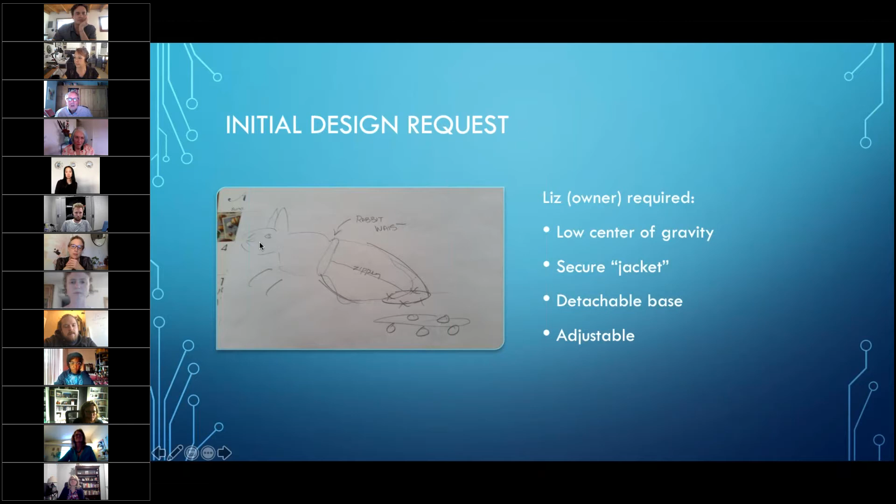Yeah, so you can see the photos again. There's Liz's sketch, her nice way to put her idea out on paper. She has no experience with 3D printing or really much as far as design or anything, but she had this idea, and it gave us a lot of direction for where we'd go next.

Yeah, and as Alec was saying, she didn't have— I mean she thought, in her head, she was picturing like a wooden circle with caster wheels on the bottom, so the rabbit could just scoot around in 360 degrees. But I don't think she knew the capabilities of a 3D printer, so we sort of upgraded her design.

But so we had to get a little creative as far as what we're going to do to make this work for a bunny.

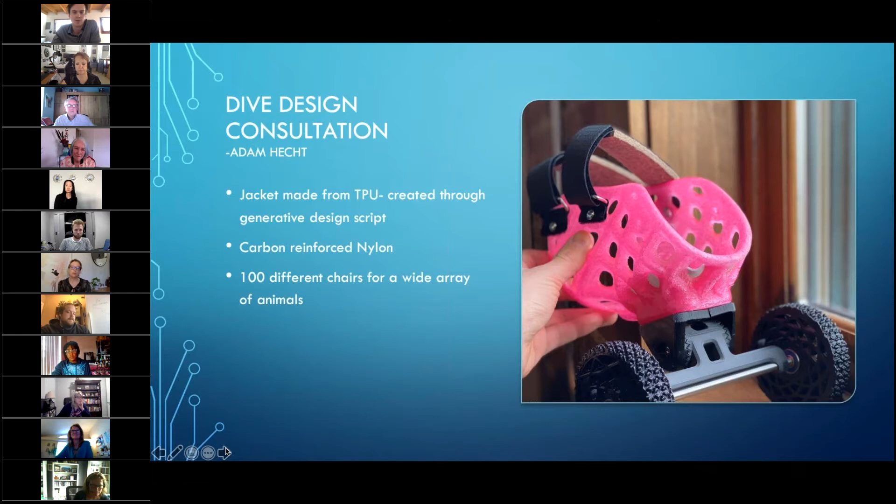On the previous slide, you noted you had used TPU and also carbon reinforced nylon. Is the pink the TPU and the rest carbon reinforced nylon? Correct. And this is the example that Dive Design did for a smaller dog, so it's a pretty different design because the front legs of a dog can still push itself around, as opposed to removing the back legs of a rabbit. It was a really cool example, and it gave us a good direction from their experience.

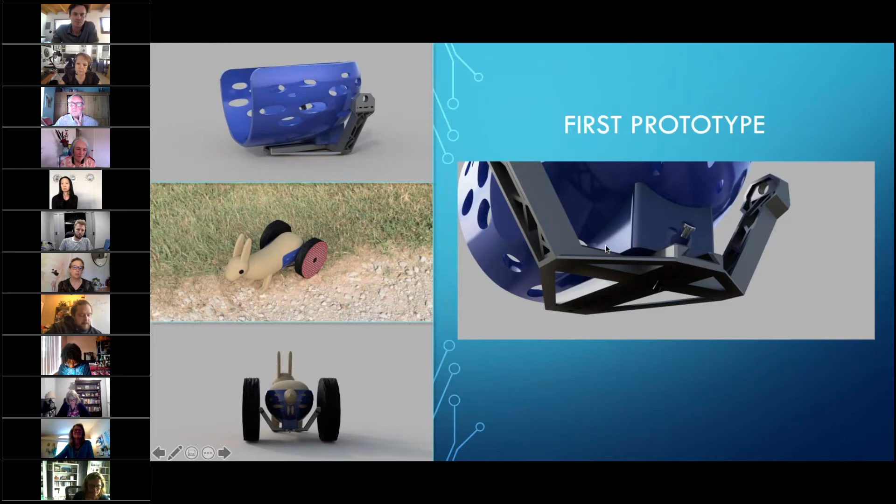So to move forward from there, Jed can talk a little bit about the wheels. TPU, if you're unfamiliar with the material, is slightly flexible - it depends on the brand how flexible, but the stuff we have is medium. So I designed a cylinder with tread, but we didn't actually model this pattern in the top picture you see inside the infill. We printed it without top or bottom layers, and in a flexible filament this lets it deform a little bit, like it acts like rubber on a tire.

This was a small test piece. The actual one is going to be bigger, maybe - I can't remember the exact size. But we're saving steps where we can.

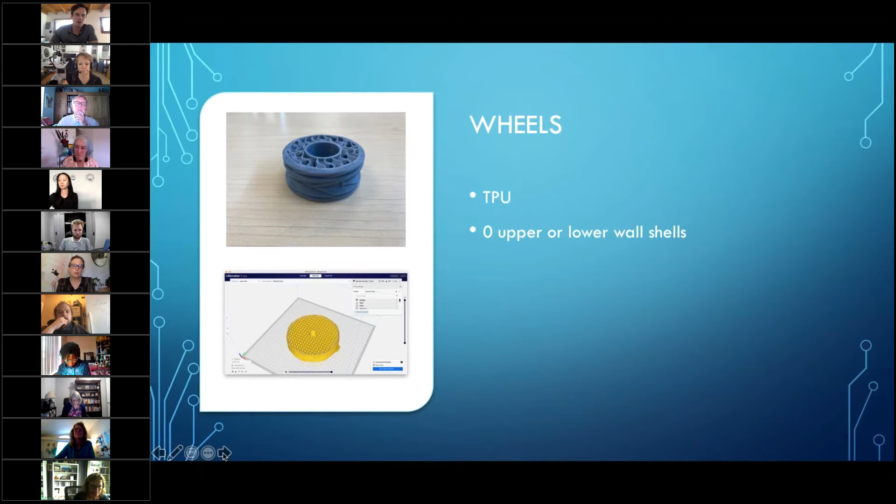I have a quick question - has the bunny figured out, does it still try to hop, or has it gotten used to the wheels? I remember Sarah's email mentioned something about it. Imagining the poor bunny on wheels - you should have put some springs in there too.

The bunny right now has one of the legs removed and it's waiting on surgery for the other. It'll be nice once it's had the surgery - it'll be a little bit lighter and able to pull this cart with its front legs. So we're trying to have as little resistance as possible, but still have the cushion of the wheels and everything.

In this picture, you can see the same idea we're using for the wheels - this gyroid infill made out of TPU, so it just squishes but then will return back to its regular shape.

We were able to get a few different components from McMaster Carr through Fusion that we can input into our design, so we know everything fits, and they were really quick to order. We couldn't use the same axle design as Adam, so we had to get these little scooter axles. But besides that, we just tried to keep it as simple as possible for Yo-Yo.

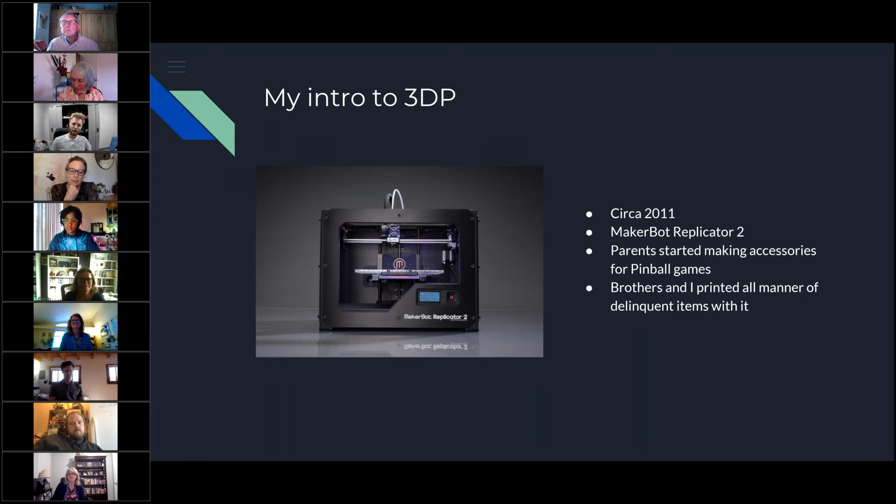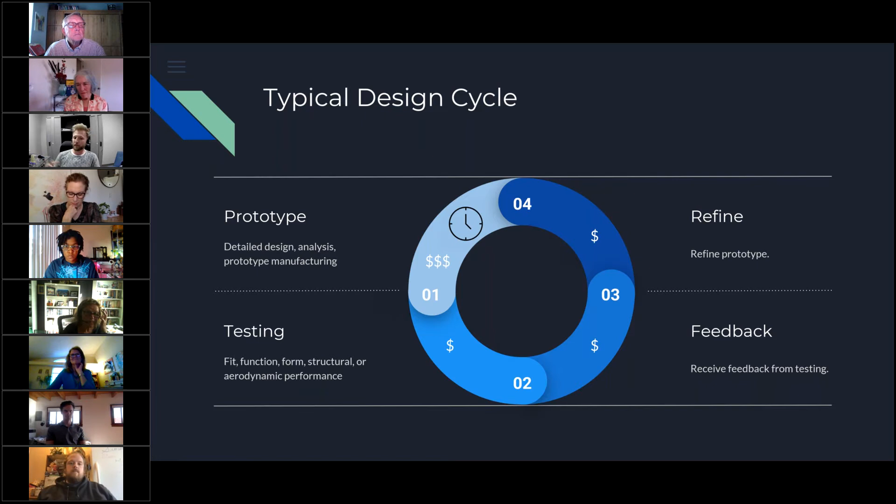I'll start with the typical design cycle for prototyping, where you do concept proofing, detailed design, testing, you get feedback from the testing, and then you refine the prototype. But typically the prototyping takes a lot of time, both lead time for manufacturing, tooling and stuff, and it's also very expensive in the traditional sense. With traditional manufacturing, you're looking at tens to hundreds of thousands of dollars, depending on what manufacturing method you're using.

So say you're making like a tank for windshield wiper fluid, and you wanted to prototype it and pressure test it and all of that. To do a mold for that, you're looking at huge lead time and big money to do it. And not only that, you also have the design for the actual part that you're doing, and on top of that, you have the design for the tooling. So there's all those other considerations and specialists that you have to have on hand.

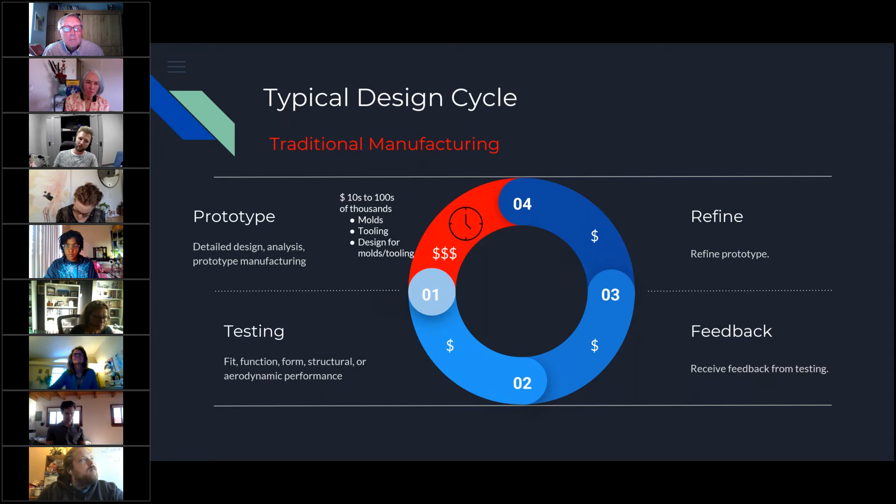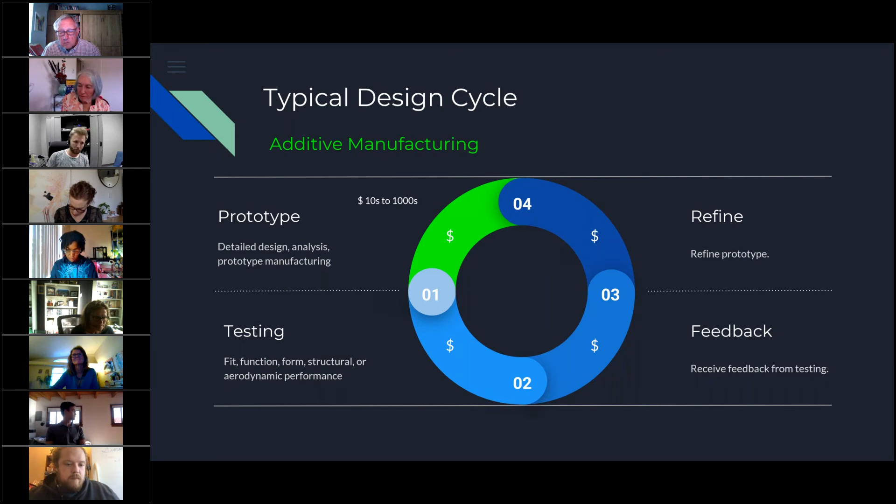And so with additive, obviously that gets reduced down. You make it to one dollar sign instead of three, and tens to thousands typically, depending on the product. We're talking polymers here. With metals it can be different, but the real value add with additive is reducing the time in prototyping. Since you have that time freed up and resources freed up, you can do a lot more testing, and you can explore the design space with greater freedom than you would be able to do with traditional manufacturing.

Before I came to Roadrunner, I worked for my family business, which is with pinball, because the small pinball hobby that my parents started became a massive business here. Well, it's not massive, it's like 6 people, but they run it really lean. Basically, we designed accessories and cosmetic stuff for pinball games—stuff that the manufacturers didn't do. It just wasn't in the budget, or they couldn't, or it wasn't feasible, whatever, we do it.

So we're always trying to beat competitors to the market because we kind of carved out this mod area of the pinball market, and then new competitors came in after we had established ourselves, and they started using additive like we had. So a new game comes in fresh from the manufacturing line, and we usually get it early through a deal, and then we have 2 weeks to get products out before the competition does. It's basically a case study in rapid prototyping.

Typically I would start, and the other designers would start working on stuff before we even received the game, whether it's just concepts or if we had pictures with rough dimensions that we could start from. But we also use additive as our main manufacturing source.

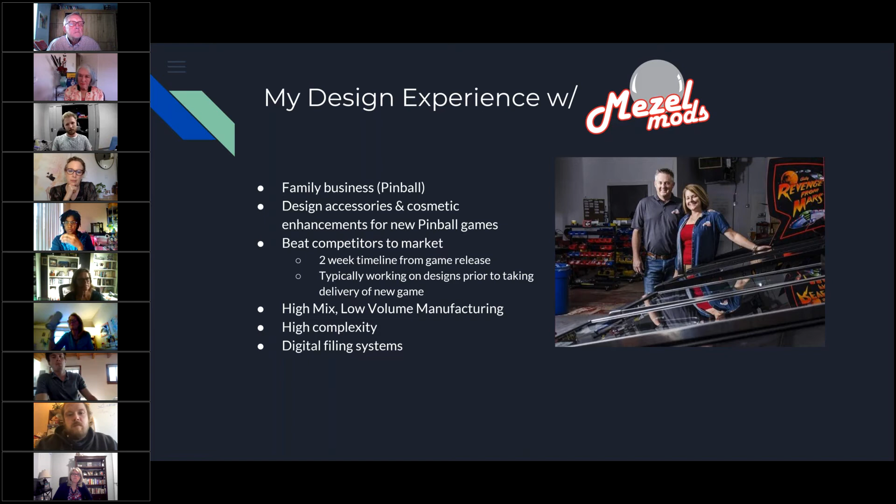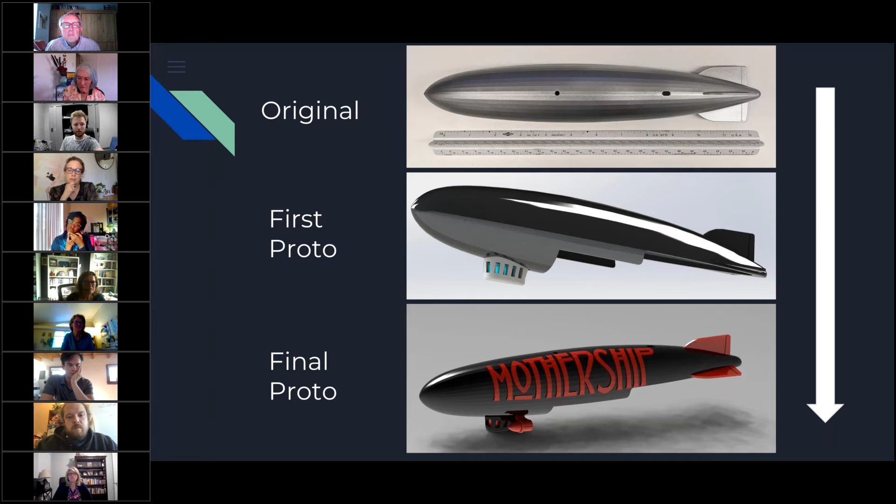It also enables us to do high complexity and store everything digitally. So here's just some quick examples. This was for Led Zeppelin, which came out just before I left and started at Roadrunner. You can see up top the one that was in the game. It was my first iteration, then the second iteration, and then there it is in game, ready to be sold.

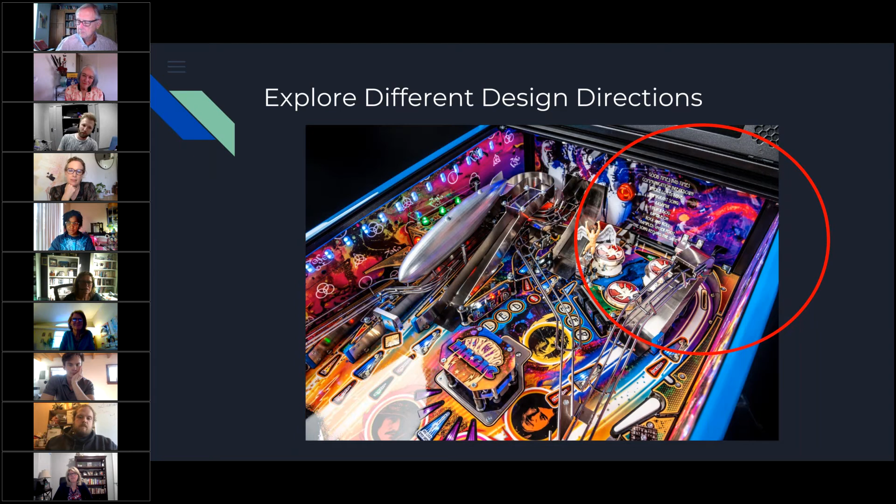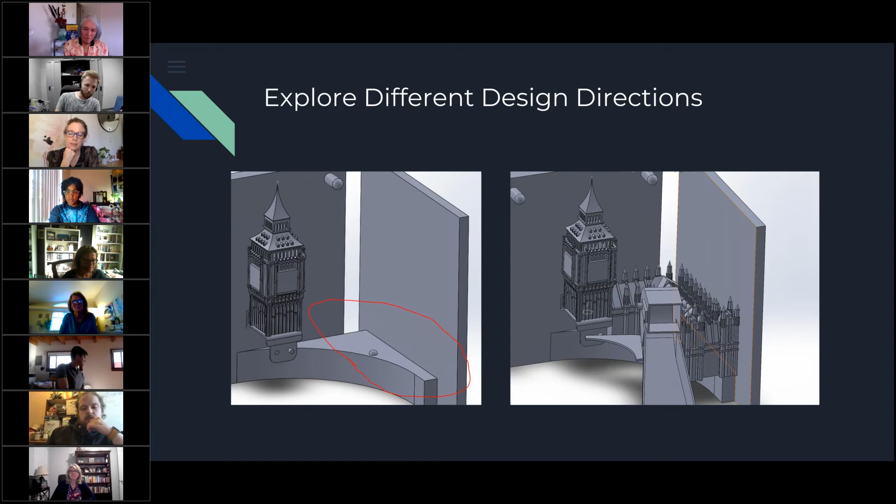Here's another example of exploring a different design space. You can see there's actually a Zeppelin over there on the left, but over here on the right, it's very empty, so we wanted to do something there. I came up with, let's do Big Ben. So I drew Big Ben and threw it in there and lit it up. Then we were thinking maybe we do something else, so we add something in. I added the Parliament building, and the final product is getting it in there.

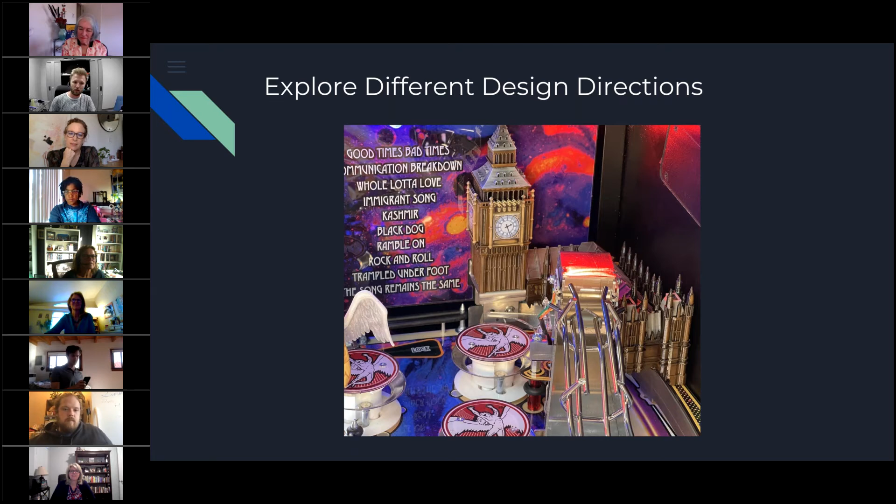So this is something you can do. Prototyping like this, you can do it in a traditional sense, but with additive it's really just painless because I can just do this. I can explore the design space however I want without the constraint of dollars and time that there is with traditional methods. But I stopped making toys and moved to Roadrunner / Westwind.

And we have industrial scale stuff here. Our bread and butter is HP's MJF powder bed technology - huge printers, no supports, very cool stuff. We also have some EnvisionTEC SLA printers, and the very special Desktop Metal Studio, which is an FDM metal printer, very cool. Here I basically am doing the same things, doing prototyping for clients, but we have some industrial clients as well, so I'll show an example of something I'm working on currently.

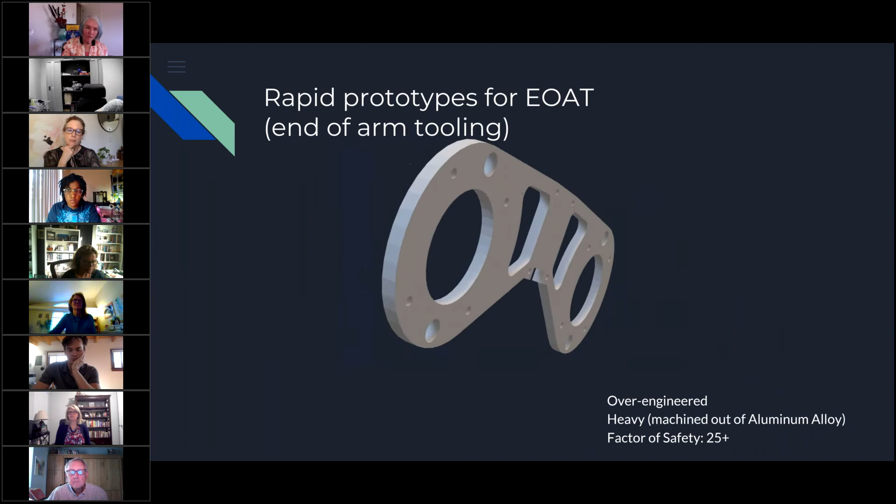So we've got this - basically it's an end of arm tool, a mounting bracket. For those who don't know what an end of arm tool is, it basically goes on the end of a robot. Here, I don't know if you guys can see this, but this is it. This goes on the end of like a Johnson & Johnson robot in the factory, and it moves stuff around. But it's very heavy - unnecessarily heavy. It's made out of aluminum, which under the loading, which is just gravity and then the torque applied from these, it's really not necessary for it to be made out of aluminum.

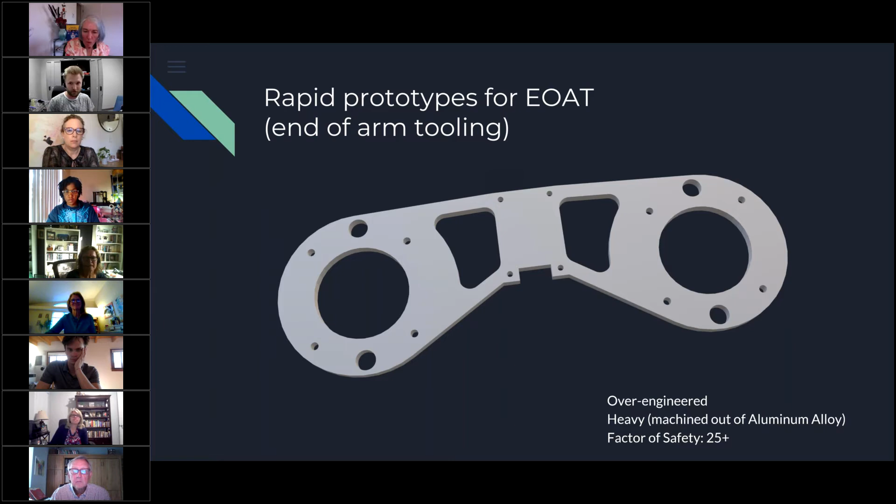It's over-engineered, and through my simulation I determined that it's basically 25 times safer than it needs to be. So this is the first iteration prototype - it's extremely light, 90% lighter, to be printed in PA12 nylon. The only problem is that it has 50 times more displacement. Under the load, it's going to move 50 times more than the other one, which even though the aluminum one doesn't move very much - I think it moves on the order of a couple millimeters - this one is 2 times away from breaking. So we could double the load on this before it would break, which is kind of typical in engineering to see a factor of safety of 2, but we want to not have as much displacement.

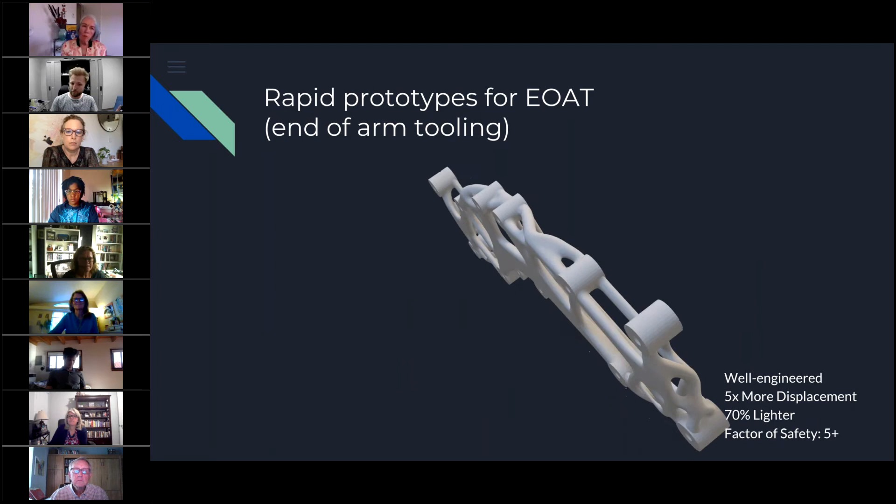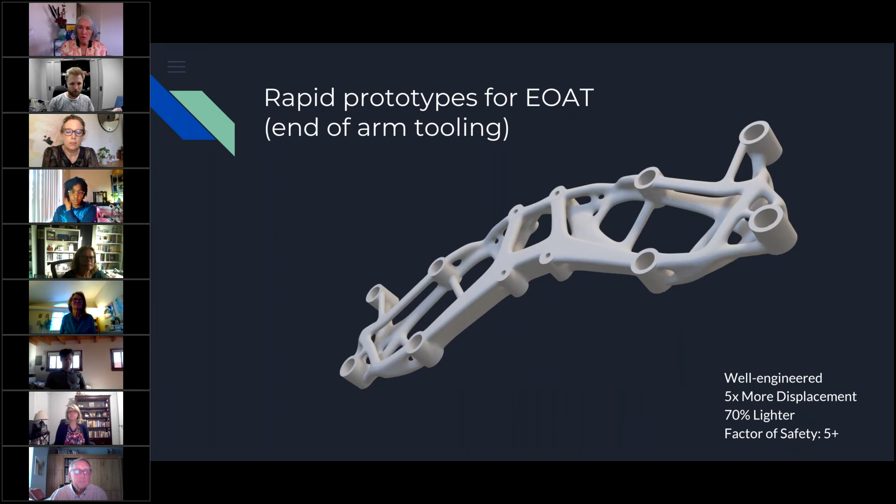So this is the second iteration I've done, which is a little bit thicker, but it's still 70% lighter than the aluminum, and it has 5 times the displacement and is 5 times away from breaking. Again, we can do these prototypes very quickly, but we also have the ability to make them quickly. There's no need for me to set this in a 5-axis mill and have it run for 2 months just to get one part, costing thousands and thousands of dollars. Here, this will cost tens to hundreds for the client, and we can really truly do some amazing stuff with additive. So yeah, I think that's all I have.

One question real quick. Oh, sorry, yeah - whoever said it first. No, I was saying, any questions?

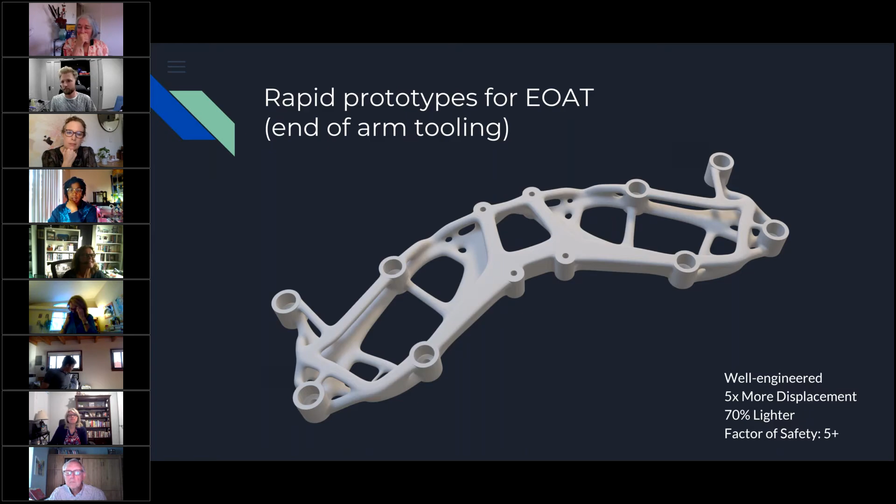The second iteration that you were sharing, what was the percentage of movement after you improved the design? So it will still displace 5 times more than the original, but the original is displacing 0.1 millimeter, and this one is only going to displace 0.5 millimeters. It's still very, very, in my opinion, negligible, because the thing is so big that 0.5 millimeter is something no one is going to notice.

Yeah, well, we'll see though - than what you had, so, to be continued. Yeah, to be continued. We'll see where it's actually printing - it's printing out right now. We just threw it in the printer today, so I added it on there, and we're going to see how it does. Maybe if we meet again, then I'll be able to show it, and we'll plate it in chrome and put spinning rims and everything. We will meet again.

Brent, for me, I think because I've done so much prototyping for customers, particularly in the medical device field, the power of digital is that a design never works the first time. It may not work the 10th time. What was it that Edison said? 'I didn't fail, I just tried 10,000 things that didn't work.' And that's what invention is about. Invention is about you keep trying until you get it right. And I apply that not just in engineering, I apply it in marketing and everything else we do, but it's really expensive in engineering. And with digital fabrication, whether it's laser machining but particularly additive...